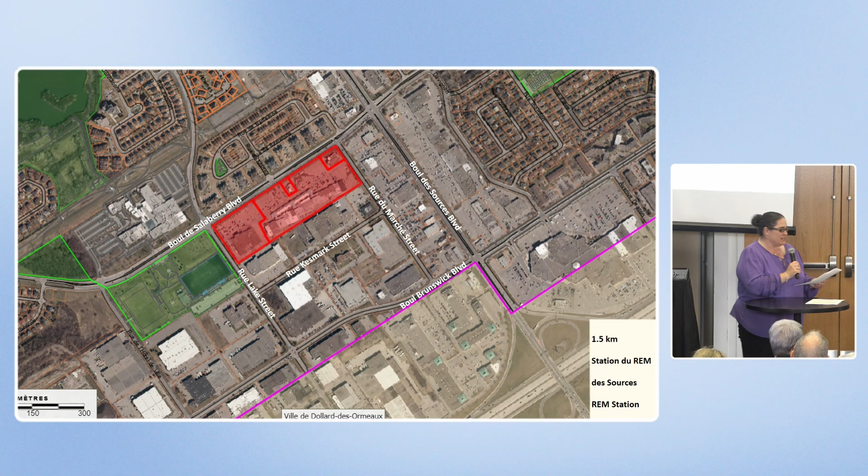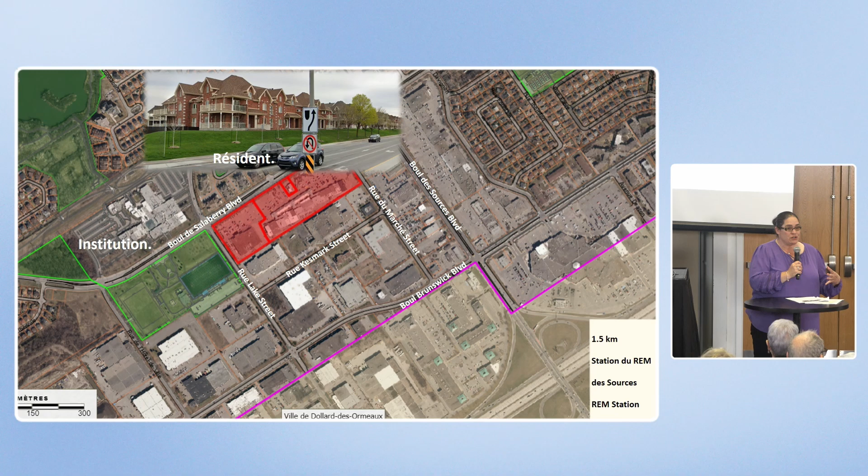To the north, we have a medium-density residential area, separated by De Salaberry, a large boulevard with 6 lanes of traffic and a landscaped median. It has sidewalks on either side and a bike lane. With its street right-of-way of 35 meters, or 115 feet in Imperial, De Salaberry Boulevard is among the widest in our city, and it's very similar to...

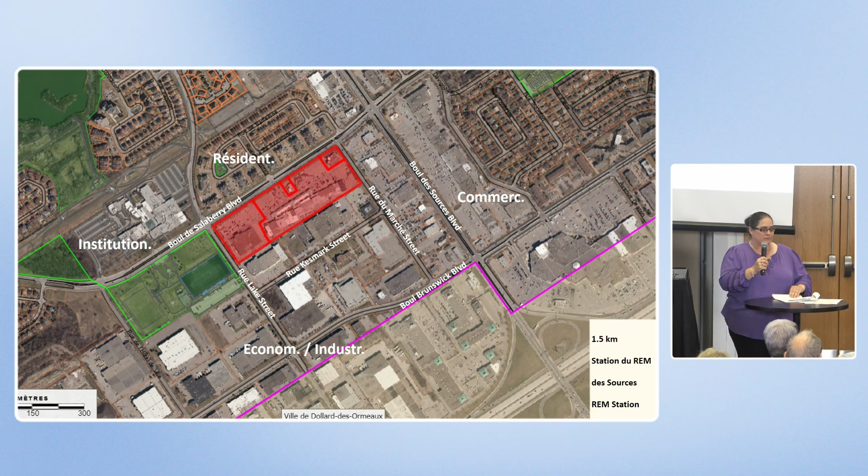So, the Marché de l'Ouest was inaugurated 43 years ago, almost to the day, on June 25th, 1981. And the other constructions were built in 2004 and 2005.

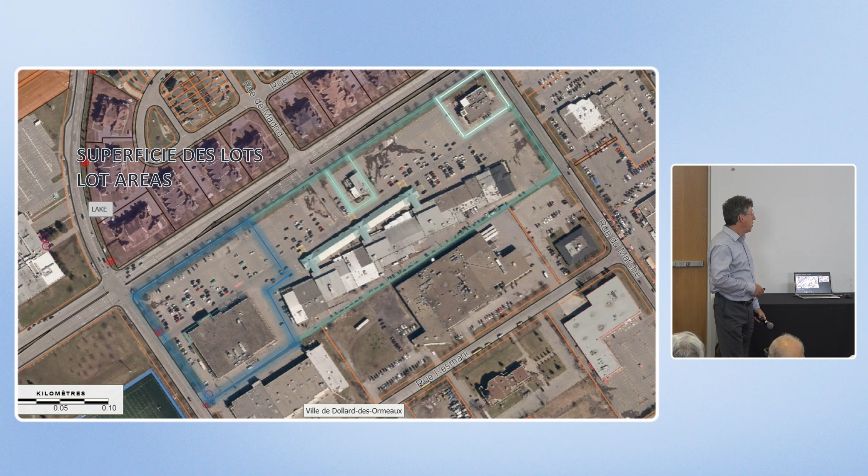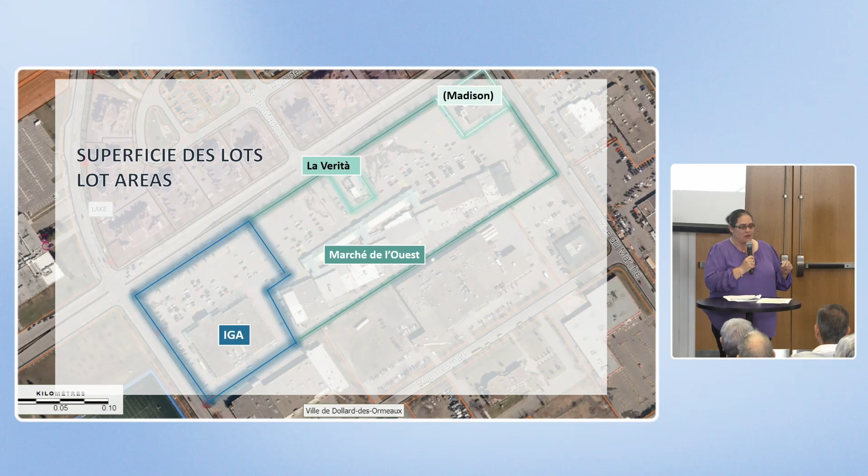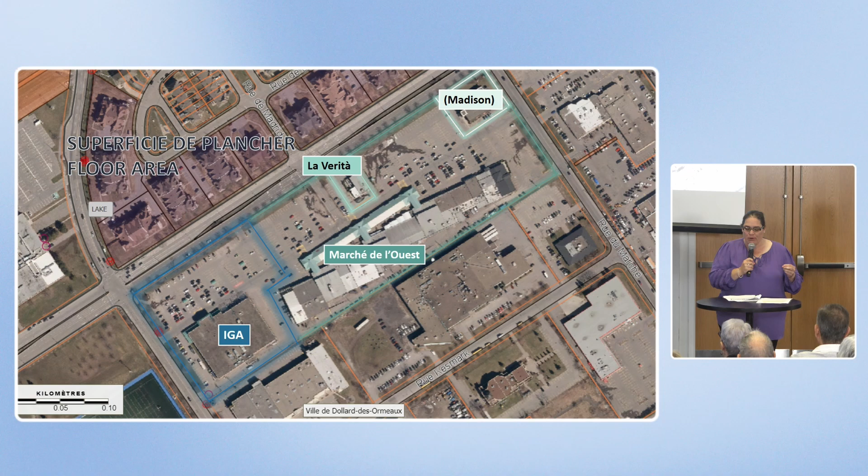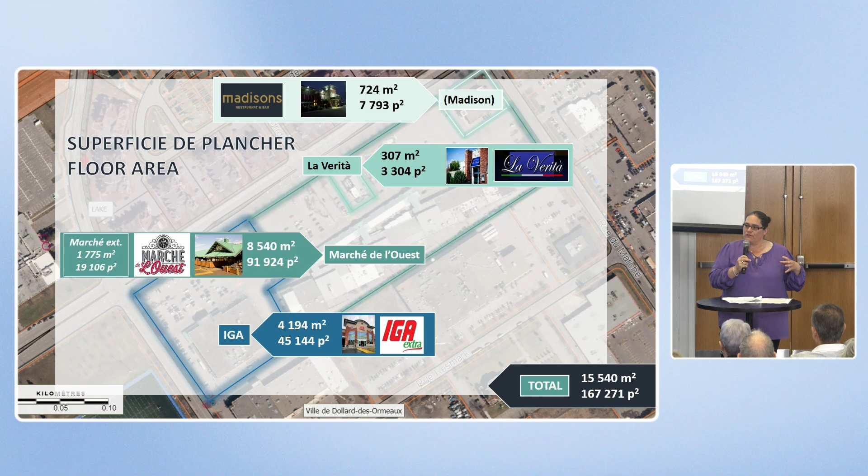And the buildings total approximately 15,500 meters squared, or 167,000 square feet. The total lot coverage, which is the ratio of the building footprints to the lot area, is approximately 25%, which means the remaining 75% is comprised of vehicular accesses, circulation aisles, and parking.

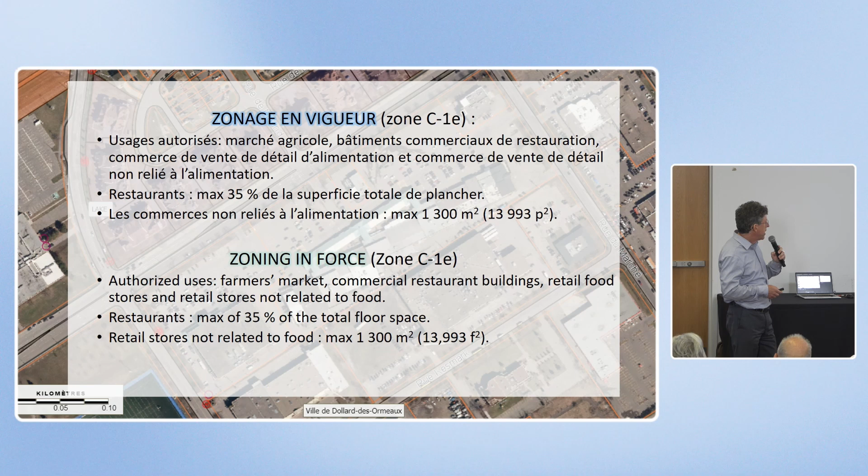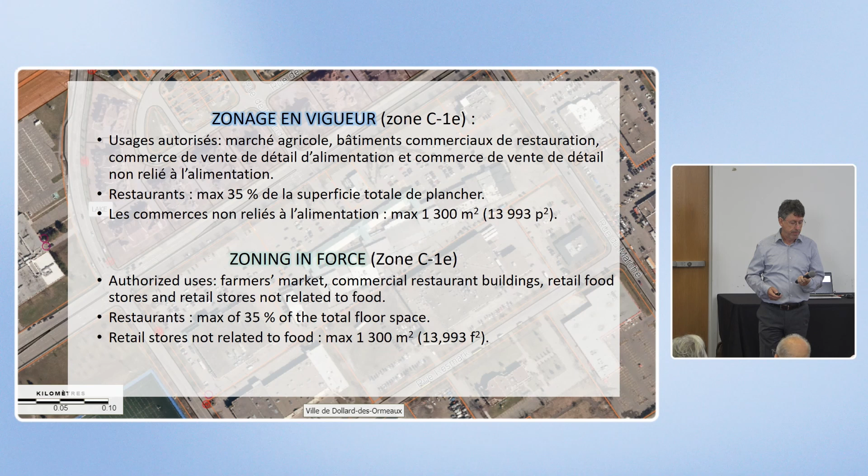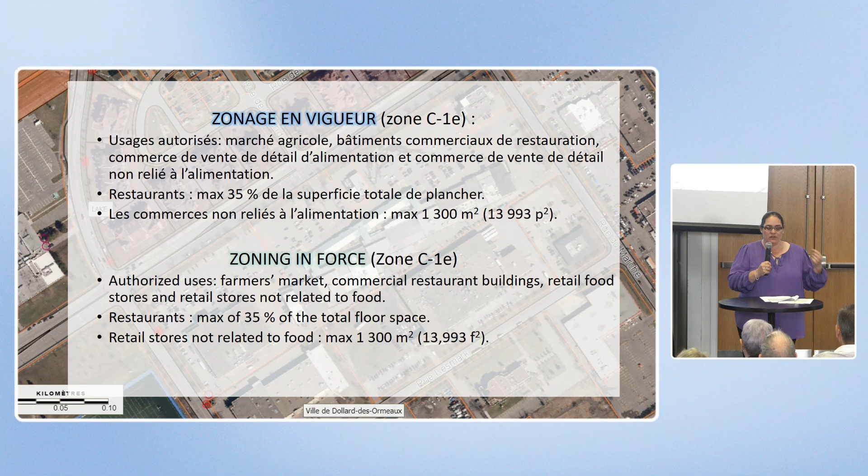So I'll just repeat what my colleague has explained. In terms of the zoning currently in force, we note that it's a zone that only authorizes commercial use, and within those commercial uses, more specifically, only farmers markets, commercial restaurant buildings, retail food stores, and retail stores not related to food.

However, there are certain constraints or conditions in place as well. For example, you can only have 35% of the total floor area in restaurants. As well, the maximum floor area is 1,300 square meters for retail stores not related to food. But there's also no maximum lot coverage — we talked about the 25% existing, but there's no limit right now — and there's no height restrictions on the farmers market.

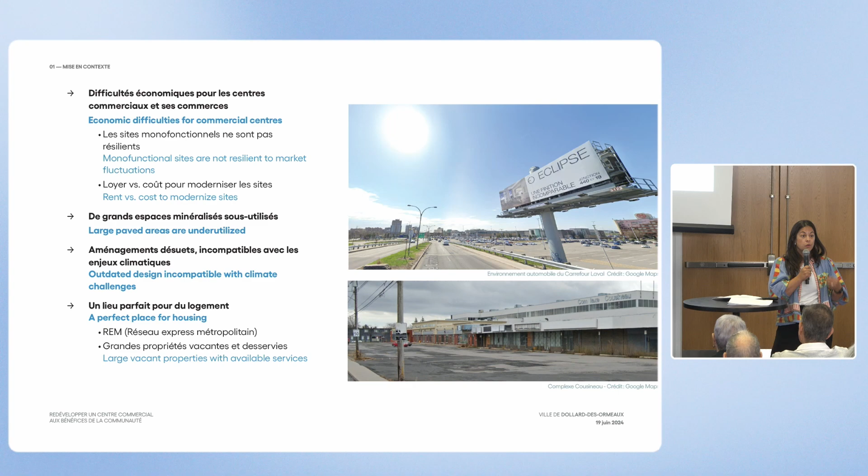While it's often difficult to watch the transition of our commercial centers become mixed-use neighborhoods, there are some positives. What it allows us to do is fight different issues like climate change.

These sites can become more climate resilient, meaning that we're not developing the vacant green space or park next door. We're redeveloping a mineralized or asphalt space, adding green space, which allows us to create more biodiversity, reduce the impact of urban heat islands or heat waves like we're having today, with green space that helps us fight that, and incorporating permeable surfaces in our projects that will allow us to better manage stormwater and therefore help with flooding.

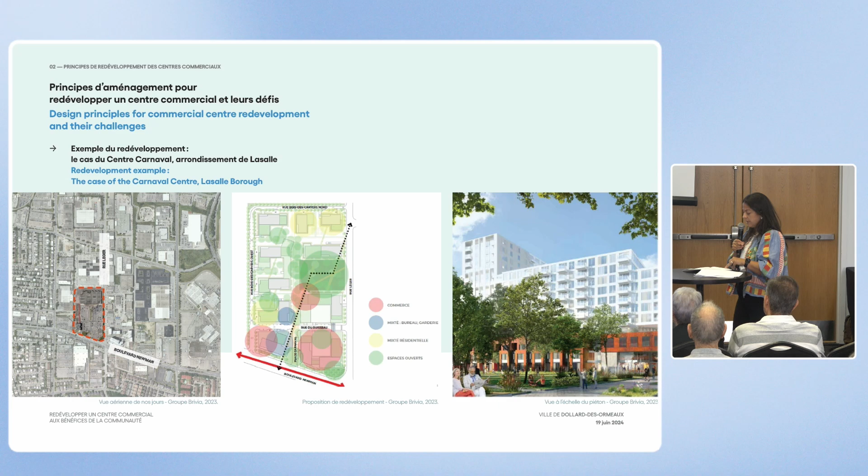Second ingredient: mixed use. These projects need to have the mixed use. For the reasons I mentioned earlier, we're bringing residential uses to these sites. But it's not only that, the new residents also become the users of the property. They actually allow the commercial uses to survive longer, have long-term viability, because the customers are living on the property. It also encourages residents to use other types of transportation like walking, cycling, and often they're situated near transit modes of public transportation.

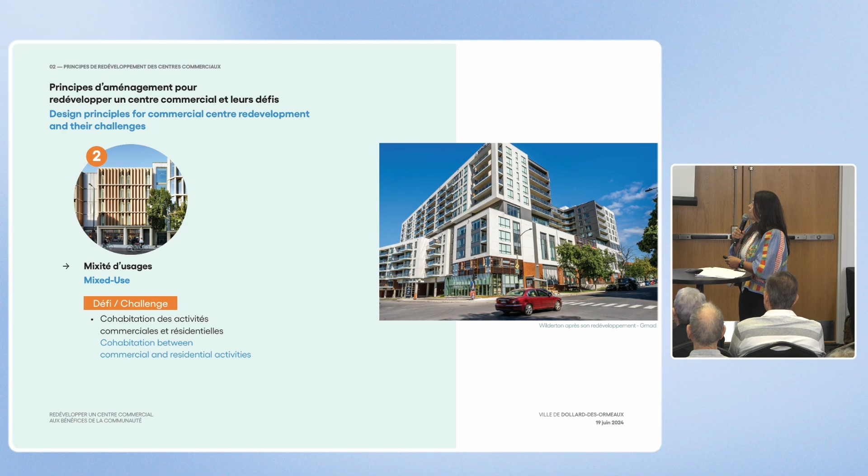One of the difficulties is the cohabitation of uses between commercial and residential, that often there are some challenges like managing deliveries or restaurants that have different operating hours. The key to success is designing the project in a way that the uses are placed in the appropriate places, and in some cases, it actually creates an opportunity.

So in these pictures, you're seeing a commercial podium, donc un rez-de-chaussée ou un basilaire commercial avec le composant résidentiel au-dessus. And the fact that the residential is built en recul, is set back, it creates a space where the residential can have amenity areas and private spaces on the roof of the commercial ground floor. And in some of these, there's actually a number of floors, commercial, where you can have offices, medical clinics. So it provides an opportunity for more commercial spaces.

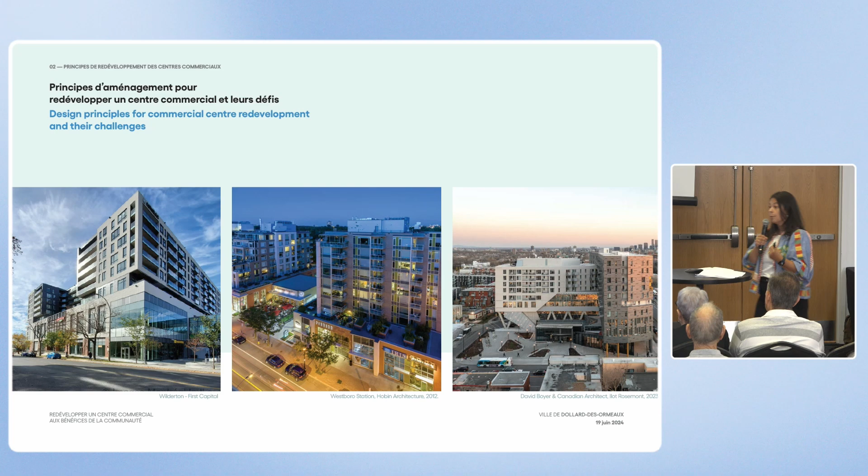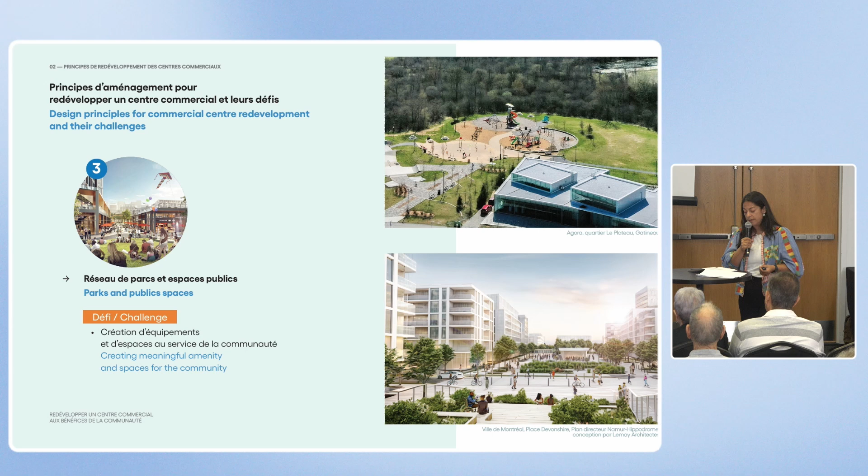So in some cases, it's a public market, it's food trucks, or as you see in the picture above, it's a playground for kids. This adding of the green space, it allows us also to have an environment, the ecological sustainability. So we're adding biodiversity, combating urban heat islands, and managing infiltration of rainwater.

The challenge here is c'est dans la conception de ces espaces. You want to create meaningful places. You don't want to have a park or a plaza that's empty. So the challenge is in ensuring that they're well designed and well animated.

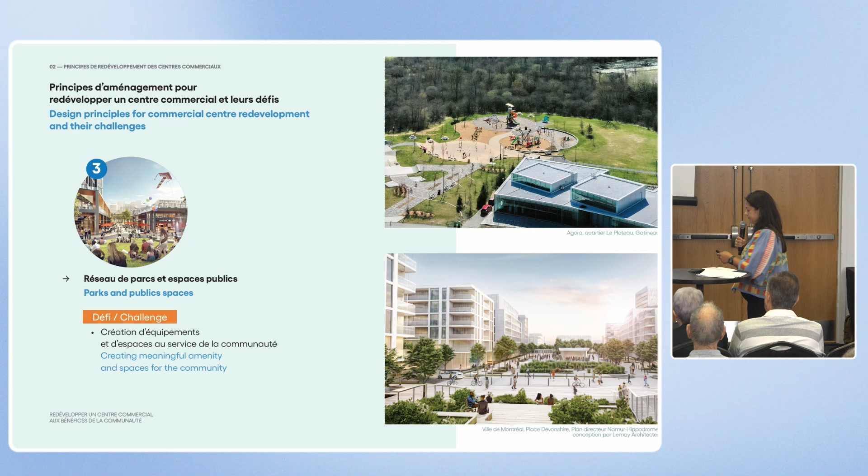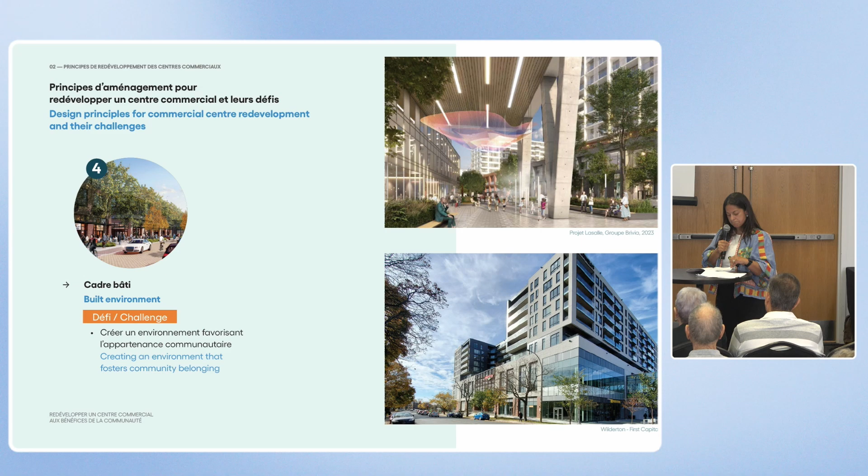Given the size of these sites, they're quite large. This is an example of a project in Côte-des-Neiges, Notre-Dame-de-Grâce. It's the Wilderton site. Ce sont des énormes sites qui ont une offre de commercial et des services pour la communauté.

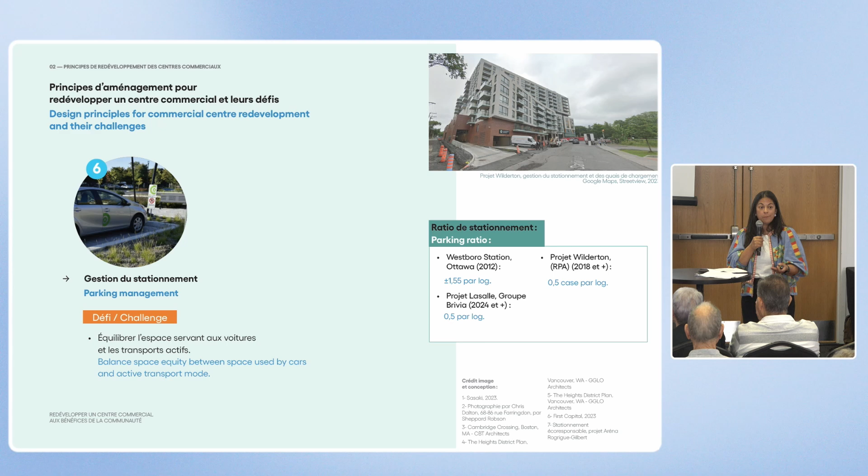Les besoins des logements. One of the things that's important to consider is that the new residents don't have the same traffic patterns as the established community. Many people who are going to live there don't need their car to go to work or to shop because they're already there. The shop is right beside them, so they're going to go by foot. And or the site is located next to transit, and so going to work, they're going to go by foot to the transit station and go to work by transit.

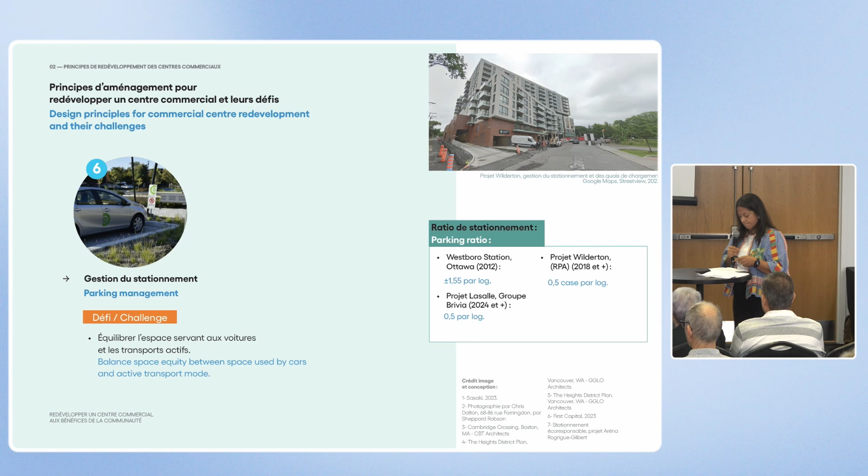This gives you an idea of some of the parking ratios that you do see in new projects. There's the Westboro Station, which is a redevelopment project in Ottawa that was started in 2012. The parking ratio in that project was 1.55 per dwelling. That was over 10 years ago.

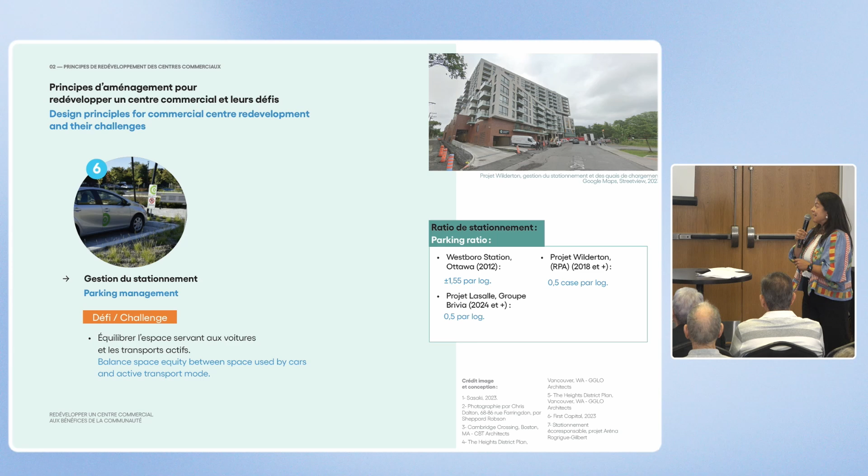Puis le projet Wilderton, qui est une résidence de personnes âgées, donc a seniors home, the parking ratio for that project was 0.5 per dwelling.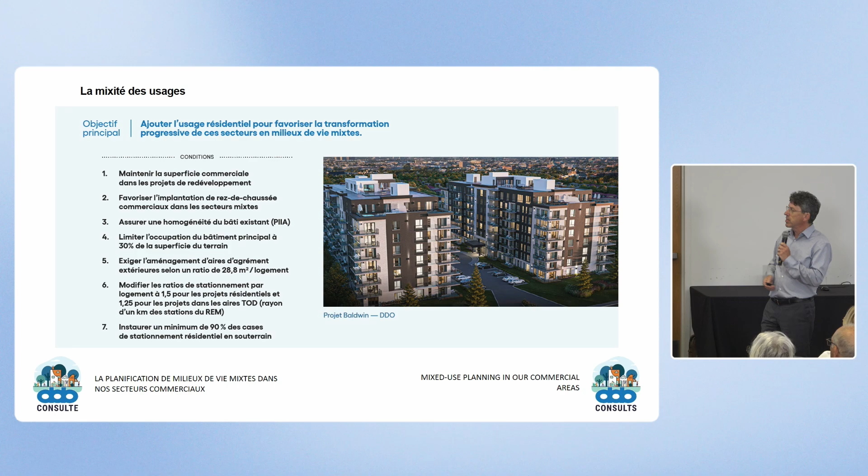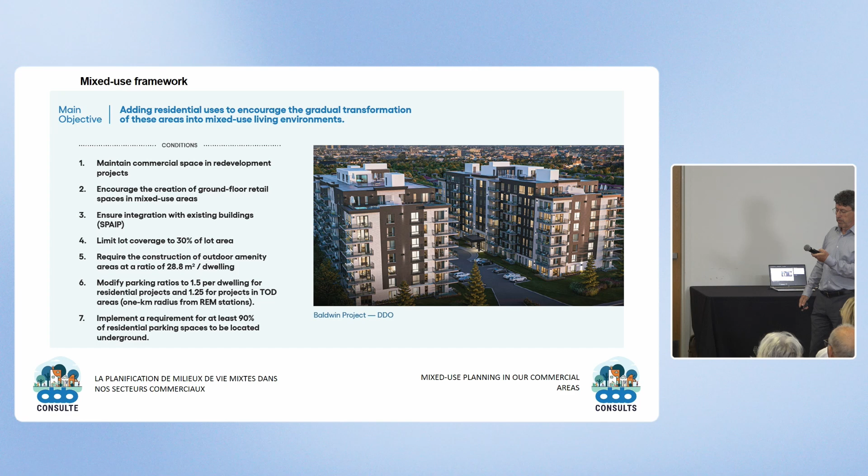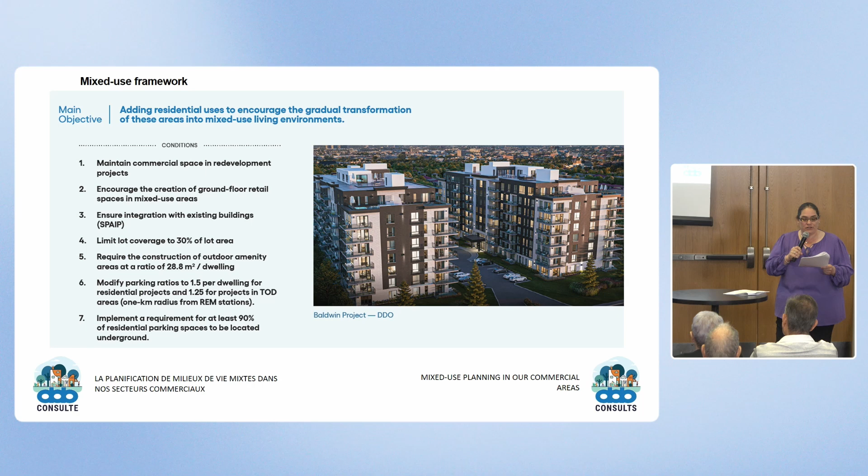So I'm just going to repeat what my colleague mentioned in French. I'll repeat it in English. So these are the general standards for mixed-use living environment that we're looking to apply to the territory of Dollard. So it would be applicable to the entire city and therefore to Marché de l'Ouest, but Marché de l'Ouest will also have additional standards that we'll see shortly.

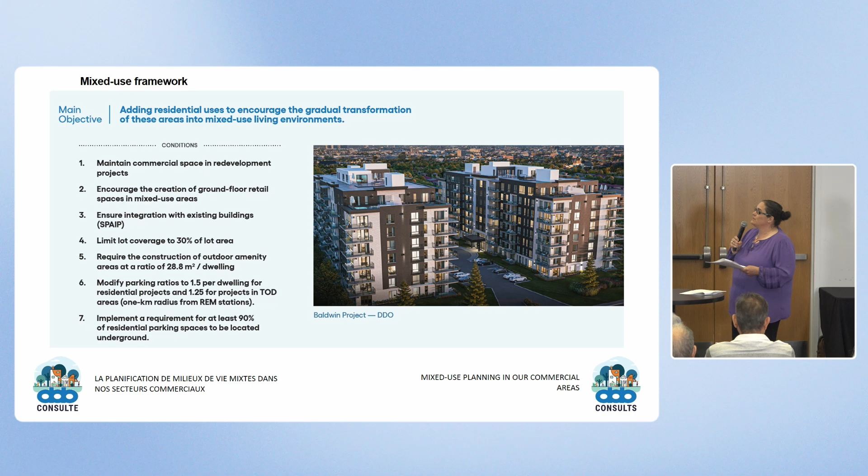So these standards include maintaining the commercial space in redevelopment projects. So where you have existing commercial space, we want to make sure that it's preserved. Encouraging the creation of ground floor retail spaces in the mixed use areas. Ensuring the integration with the existing buildings. Limiting the lot coverage so that the total footprint would not exceed 30%. As we mentioned, Marché de l'Ouest is currently at 25%.

Requiring the construction of outdoor amenity areas at a ratio of 28.8 meters squared or 310 square feet per dwelling unit. Modifying the parking ratio to 1.5 parking spaces per dwelling unit for residential projects and 1.25 spaces per unit for projects that are located in transit-oriented development areas or TODs. And those are within 1 kilometer radius of the REM station, for instance.

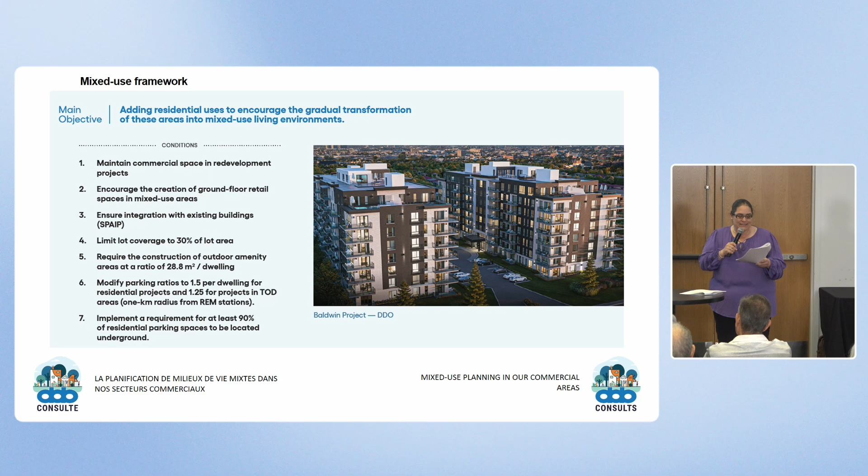Then we'd also look at implementing a requirement for at least 90% of all the residential parking spaces to be put underground.